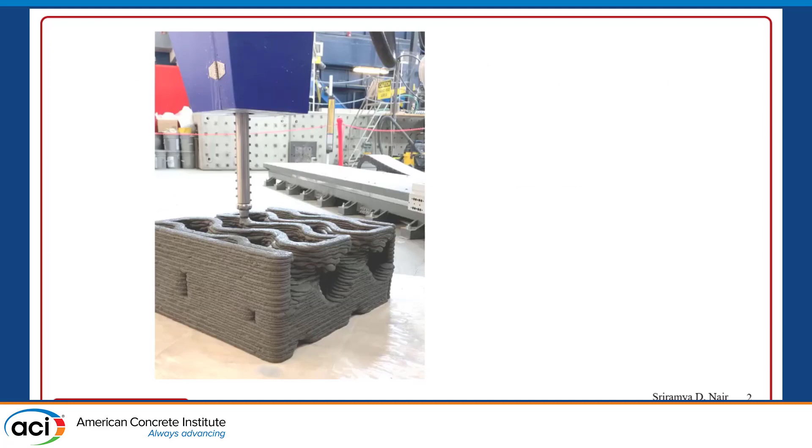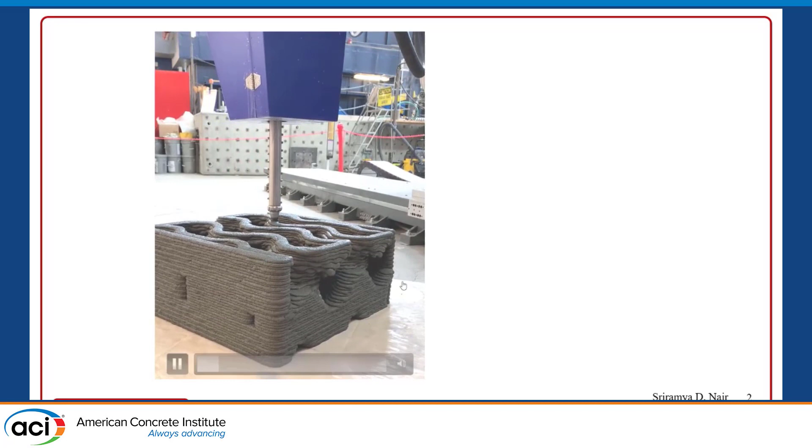So I just have this short video. We don't need volume, but you can see how this technology is where you could place material layer by layer. The material is getting extruded, and we can make any shape that we want to make. That's the whole idea behind how 3D printing is different than other technologies. I did say 3D printing because that's what most people call it, right?

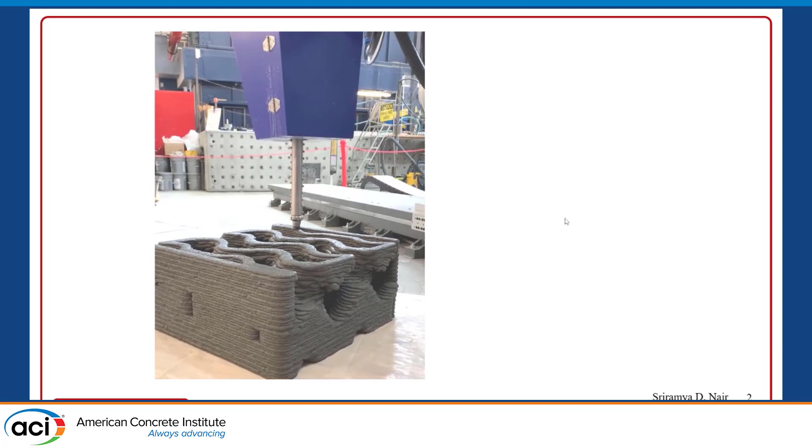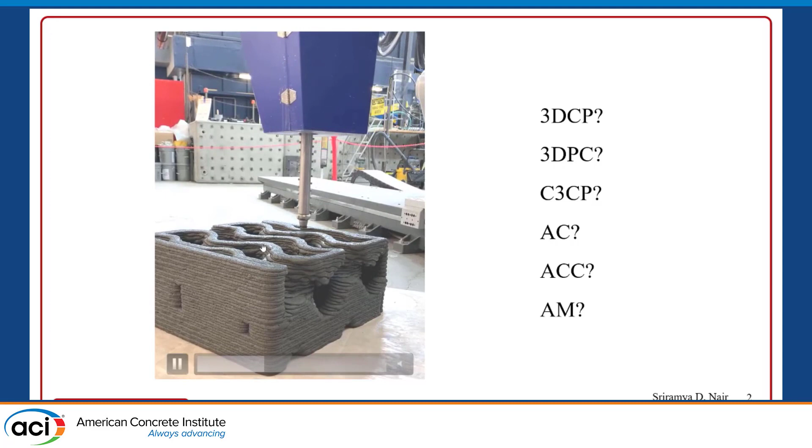So the question is, what should we call this? These are all the acronyms. So I'm going to go at each of the acronyms and talk about what's being done. But the main idea is you have a material that's being extruded, and it's being placed layer by layer, and it's following a certain path.

So you could ask, what's in a name? That's what Shakespeare said, right? What's in a name? That which we call a rose by any other name would smell as sweet, and then that would be the end to this discussion. So that means we could say that which we call 3DPC by any other name would still behave the same. Then we'll be done. But however, it's not that simple.

It's really important to pick the right terminology, right name, because if you pick something that's too narrow, you're not being inclusive, so then that term is not as useful. But if you're too broad, then you have to go into the specific details about how you fit into such a broad name. So it's really important to pick something that's right and something that's not wrong.

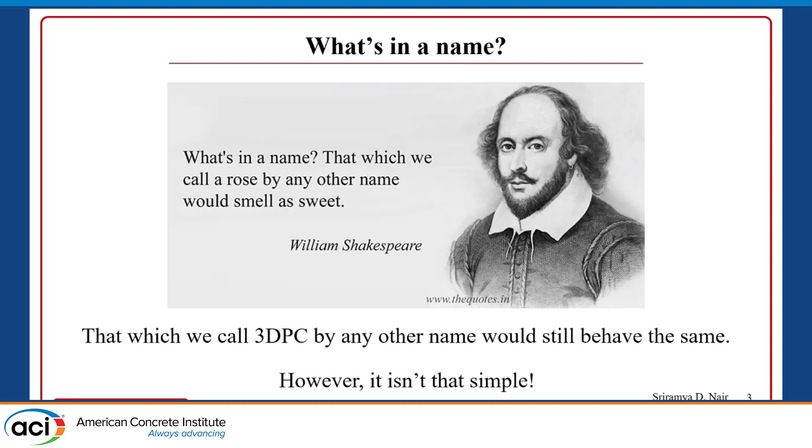So the definition for concrete, there is CT23. These are terminologies that are defined by ACI. It's a published document by itself. And you can see how it says it's a mixture of hydraulic cement, aggregates, and water, with or without admixtures, fibers, or other cementitious materials. So in this one, it doesn't actually specify the size of the aggregates. It's very general. It just says aggregate.

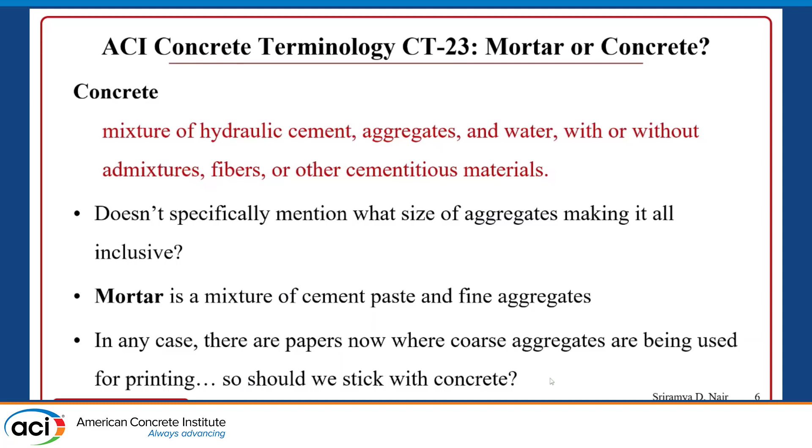So when you look up the definition for ultra-high performance concrete, it's a concrete, but it doesn't have any coarse aggregates. So we are okay with using the term UHPC, then why is it a problem for 3D printing? Because even UHPC, the definition doesn't say anything about aggregates. It's more about the performance, right?

So they're talking about what's the compressive strength? Is it flowable? Does it have fibers? Is it ductile? But then in their emerging technology report that came out in 2018, you could see that they gave examples of 2 mixture designs, but there's no coarse aggregates in them. So I'm just trying to show that there is previous use of concrete for a material that actually doesn't have coarse aggregates.

I hope you're all paying attention to this because you have to give me input on what you're voting for, in a way, right?

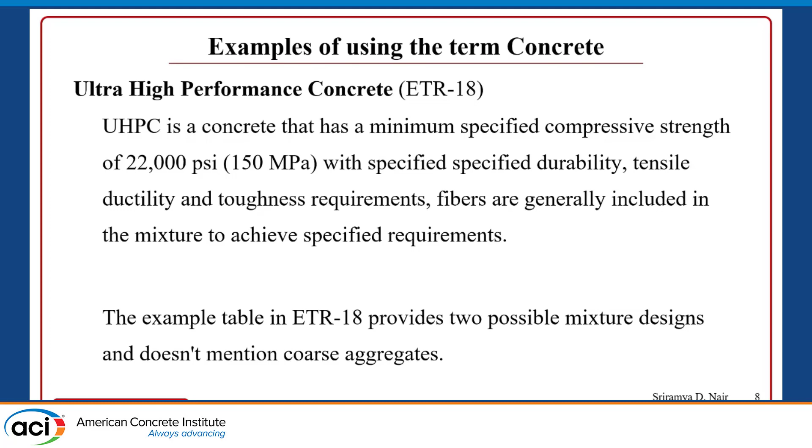So, going by that example, you could define 3D printed concrete. So similar to ultra high performance concrete, this is 3D printed concrete. 3D printed concrete is a concrete that can be pumped, extruded through a nozzle, and can be placed layer by layer to achieve optimized, desirable shapes. So you can make any shape that you want by using 3D printing. This is just a rough example.

So I think I like 3D PC over 3D CP. This is again my personal opinion. Because it sounds like UHPC, it's 3D PC, concrete comes in the end, instead of concrete coming in the middle where it's 3D concrete printing. It's all very small changes in the terms, right?

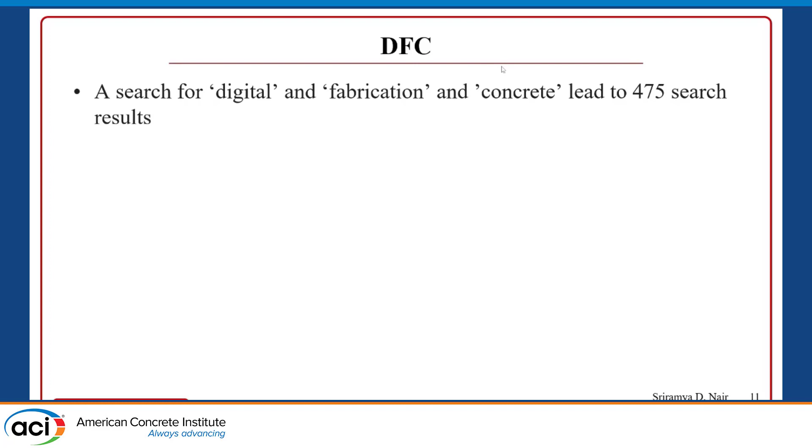DFC is a really popular one, but I couldn't just search for DFC. So instead, when I did the Web of Science search, I added digital, fabrication, and concrete. So all 3 words had to be there somewhere in the document. And then these are the terms that showed up, and they showed up 475 times. So DFC is quite popular.

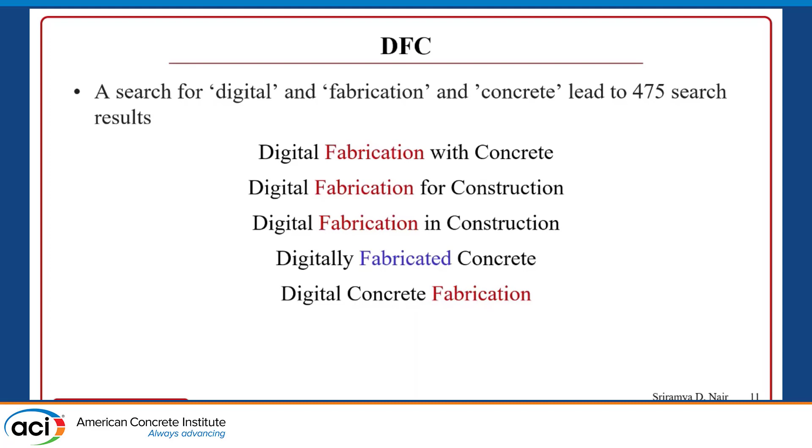So even this, there's digital fabrication with concrete, digital fabrication for construction, in construction, fabricated, which is past tense, digital concrete fabrication. So there are a few different variations of this too, but this is quite popular. So DFC actually comes from the RILEM Technical Committee 276. This was active between 2016 and 2020, and then they published a paper in 2020 in CCR on this topic.

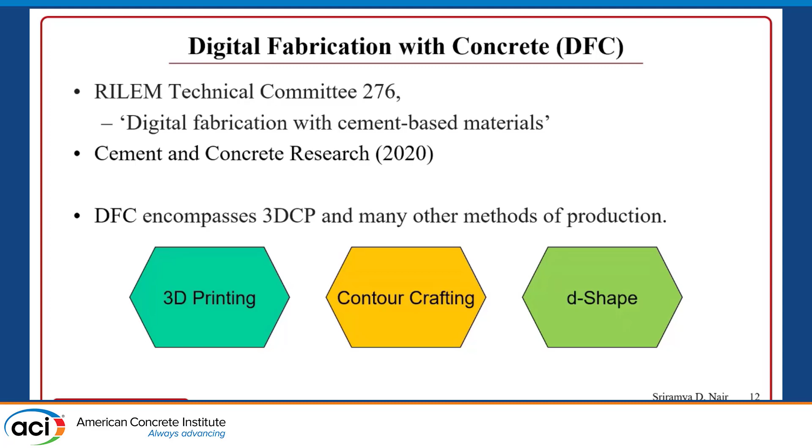And what they were trying to say in this paper is that this digitally fabricated concrete, DFC, encompasses different types of automated construction, if you want to use that word. So it's not just 3D CP, but there's contour crafting, there is D-shape. So they're trying to make it all inclusive, and they have a broader name called digital fabrication with concrete.

So closer to home, there's an ASTM committee on additive manufacturing. This is committee F42, but this is not just for concrete. The committee focuses on additive manufacturing in general. So they have coined this term additive manufacturing for concrete, so AMC. And this is a process to join materials to make structural and non-structural elements or components and systems from 3D model data, usually by depositing material layer upon layer, as opposed to subtractive and formative manufacturing methodologies.

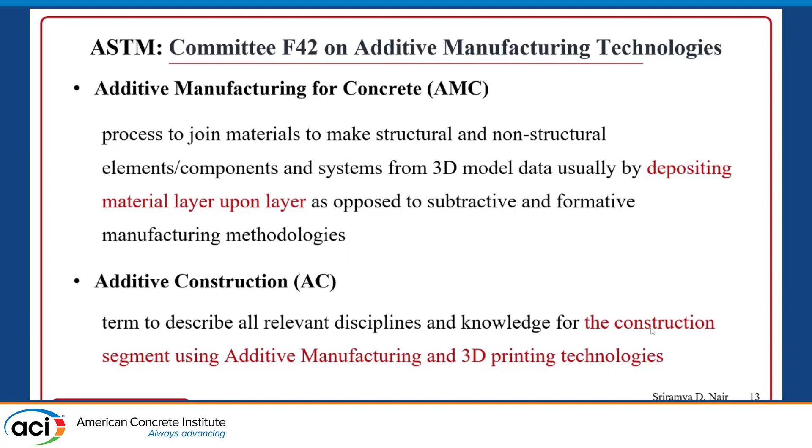They also have additive construction, where they say that when this is relevant for construction applications, then we could use additive construction. And this is important because if you look up definitions for manufacturing versus construction, manufacturing is something that you make by hand or machines. In a way, we are making concrete by a machine, I guess. But when we think of manufacturing, we don't think of concrete or the construction industry.

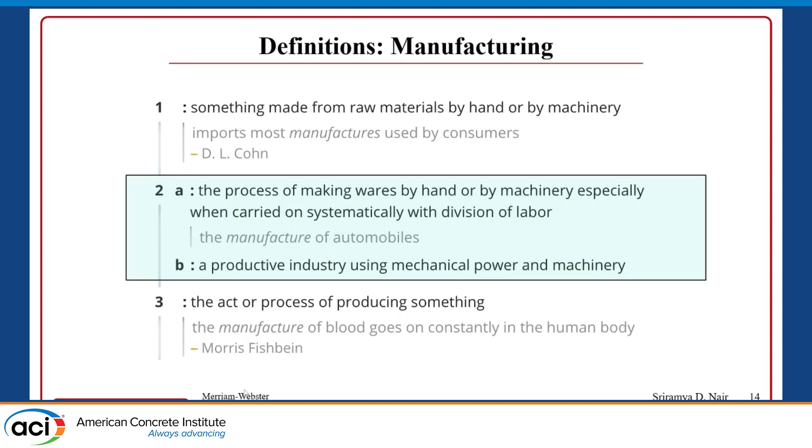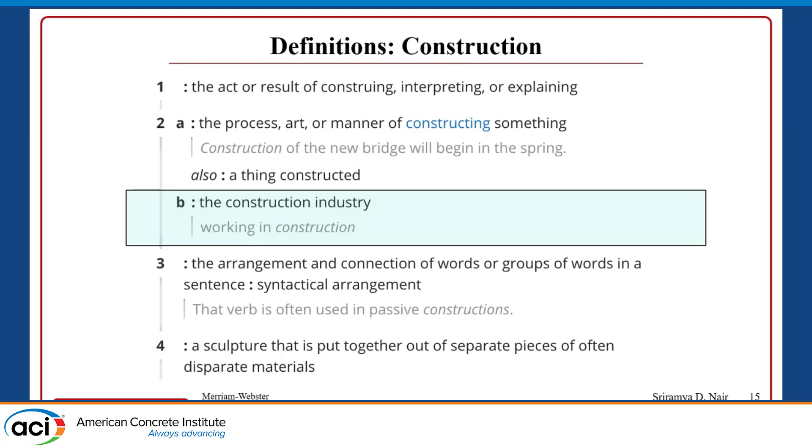So this one I didn't Google. I actually went and found a dictionary source. And when you look at construction, it basically says the construction industry. So the definitions for the two, there is a difference. But the other thing I want to show is the North American Industry Classification System. So this is where companies fall into different categories, and you could see that there's different ones for construction and for manufacturing.

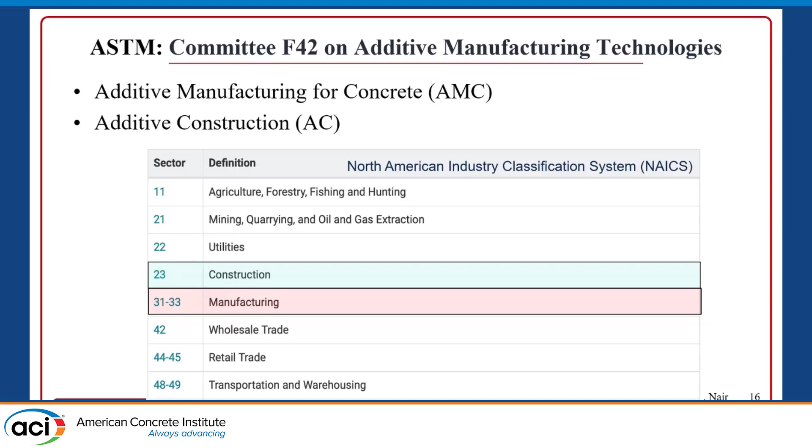So the sectors are different by themselves, because concrete, whatever we're doing, it's mainly for buildings that we're using them right now. So should we stick with construction and not use the term manufacturing? That's the point of this one. That should be, because sometimes people refer to this as AM. I should have actually done another search with AM and concrete, I guess. I did not do that, so I did miss that one. But the question here is, should we stick with construction and not use manufacturing?

So this also came up in the meeting last time. It's not just my opinion. Six months ago when we had these discussions, the general consensus was, let's not use manufacturing, let's use construction. Again, you'll get your say, so don't worry about it. Nothing is final. And so the next question is, should we use construction or concrete?

I think for me, the main sticking point is I'm surrounded by enough people in general that think that by 2050, we're not going to be using concrete at all, right? So I would like the terms to actually have concrete and not just be very general, because we want to make sure concrete is going to be around. I guess you all agree that concrete is going to be around by 2050, right?

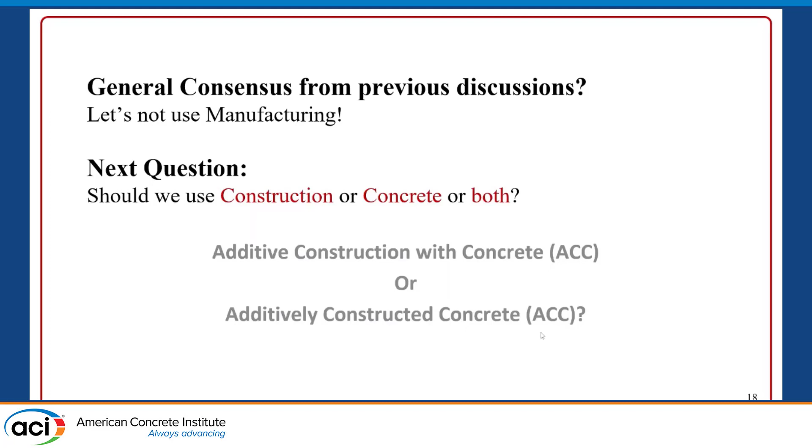It's not going away. So if you want to use both construction and concrete, then it becomes additive construction with concrete. So it's similar to the ASTM one. So instead of AMC, it becomes ACC, where we've replaced manufacturing with construction. Or the other one I've seen is additively constructed concrete. So that's past tense. So it depends on which one we like better.

Okay. So there is another new one. Sean is over there. I told him this is a plugin.

So NIST has a new consortium, and they're calling it additive construction by extrusion. So there's another term in here where they're calling it by extrusion. But the additive construction is similar to the ASTM terminology. So the question is, do we need extrusion in the term, right?

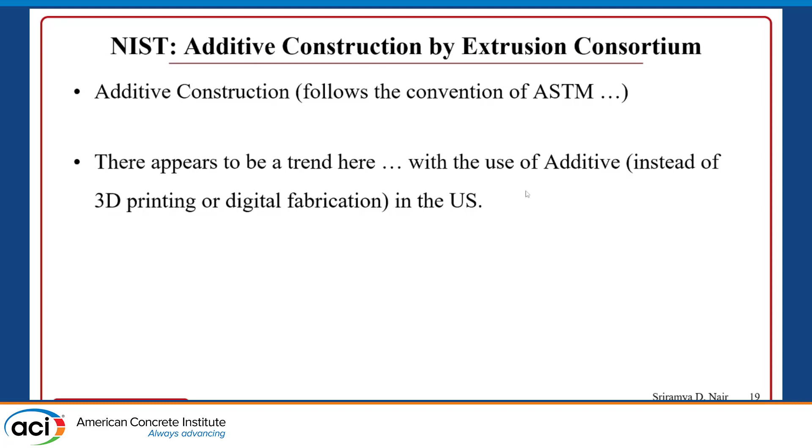Oh wow, we have 10 responses. 18. 24. This is awesome. I'm loving this real-time feedback.

Okay. So we have 34 responses so far, and 57%, which is a reasonable majority, like 3DPC, 3D printed concrete. And then the next one, by 28%, is additive construction with concrete. So we are thinking of running this poll again in the committee meeting tomorrow, and that way we can pick

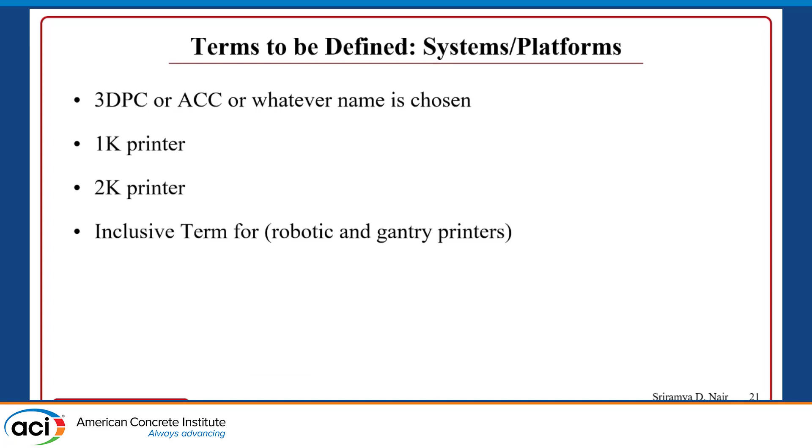Okay. I'll open it up for discussions. These are just other terms that we're going to define. Yeah. So this is a great job, and this is extremely necessary. So as you know, ACI, ASTM, and also ICC, they're also working on different standards, different specs. So besides ACI, I'm also with ICC, the 3D committee, and right now I'm the group lead for the material group.

Okay. So this is great. So what we want to do from that side is try to be consistent with what you are doing. We don't want to cause more confusion. So anything you work out from here, we will want to put more inputs also, so we're consistent across all this, okay? So this is very difficult. It's not easy to choose one, yes. Right? There are so many different opinions, okay?

A good example is just 3D printed concrete or 3D printed mortar. So you mentioned the UHPC. That's a really good example, just stay with the concrete. But the challenge is, we have to realize the test method between mortar and concrete: there's some similarity, there's difference. And also, once we talk about the performance specs, there's also difference. So we need to put that into consideration, right?

But I think all the tests are different with 3D printing because you can't just do a compression testing, because it's not isotropic. So you have to do it based on your layer orientation. So even simple tests become complex when it comes to 3D printing. So it's not just concrete, it's 3D printed concrete or 3D printing with concrete, whatever we decide. It's 3DPC. I think that's where the difference is too.